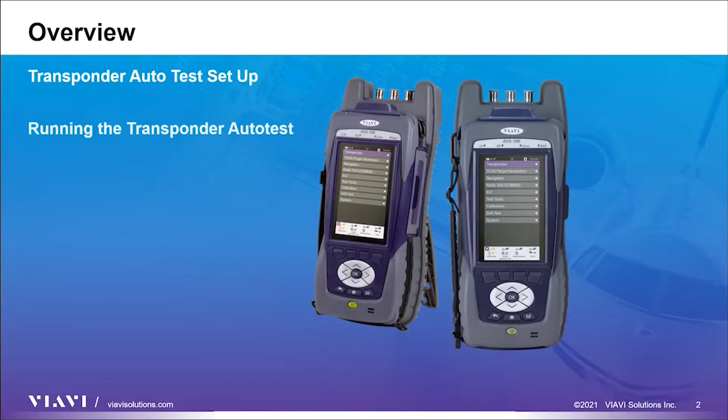Hello and welcome to this training video on setting up and performing a transponder autotest using the AVX-10K flight line test set from VIAVI Solutions. In this video, we will be discussing the settings and procedures for transponder auto testing using the AVX-10K. We will also go over saving and reviewing test results.

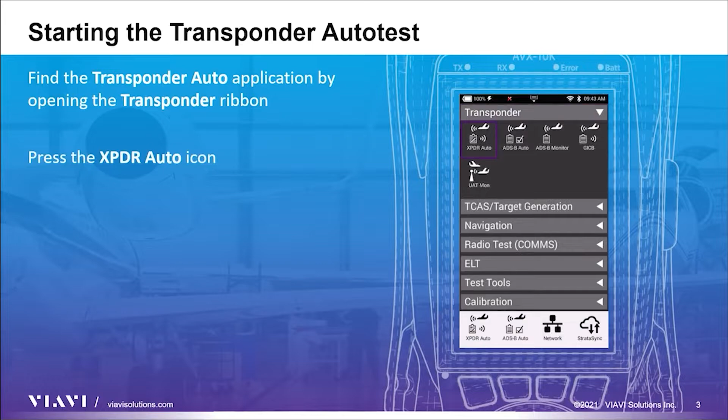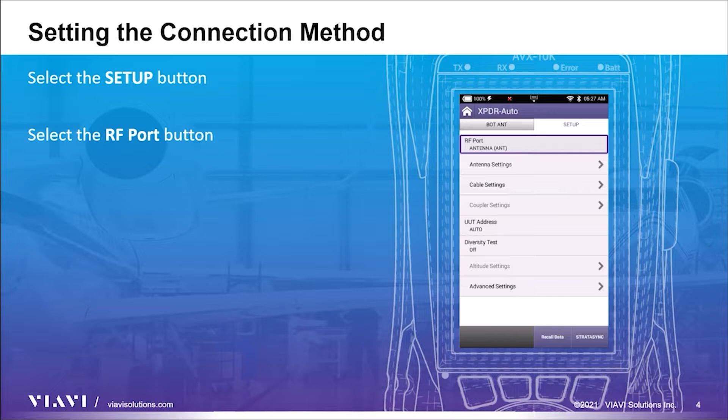After turning on your test set, open the transponder ribbon and select the transponder auto application. Before we start our testing, let's go over a few test setup parameters. The first step is to define the method of RF connection to the transponder you will be testing.

Press the RF port button to set the connection type. These are antenna, which uses the over-the-air flat panel antenna, direct connect, and direct connect with coupler.

Next, we will look at how mode S addresses work with the AVX-10K. The AVX-10K can automatically determine the mode S address of the transponder under test. In the auto condition, the AVX-10K sends out an all call. The transponder responds with its mode S address and is shown to the operator.

The AVX-10K will also use the UUT address to save test results by including this information in the name of the test result file. This helps technicians look up and manage reports by aircraft.

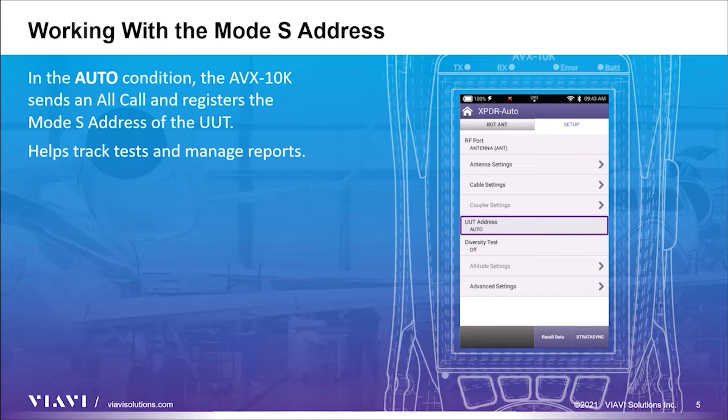To set the AVX-10K to automatically detect the mode S address, select the UUT address button. In the pop-up, click the UUT address mode button and then select Auto.

Sometimes it is necessary to manually enter the mode S address. For example, this could be when the AVX-10K is near other aircraft with their transponders energized. To manually enter the mode S address, select the UUT address option. Select Manual in the resulting pop-up. To change the mode S address value, click on UUT address and enter the values using the on-screen keyboard.

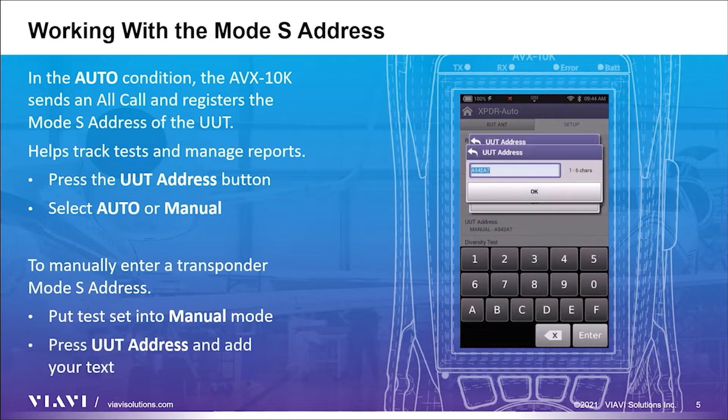Depending on the connection method chosen, there are a variety of coupler and cable loss, cable length, and antenna gain values that will need to be entered. See our video on general preferences for more information on these settings.

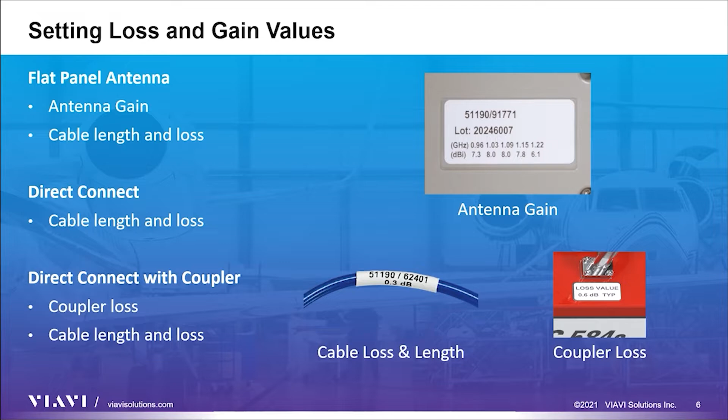Loss values can be found on labels applied to the couplers, cables, and flat panel antenna. Don't worry if you don't have a cable loss value. The AVX-10K will generate a loss value based on the length of the cable that you enter.

The diversity test setting tells the AVX-10K that the UUT has dual channels and will test both bottom and top connection points. The diversity test setting has only two options: off or on.

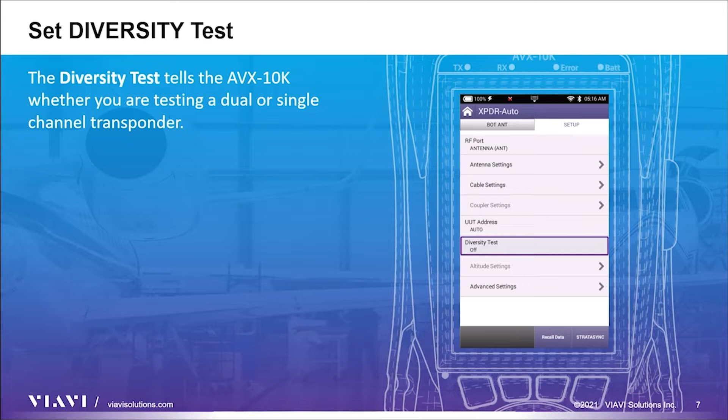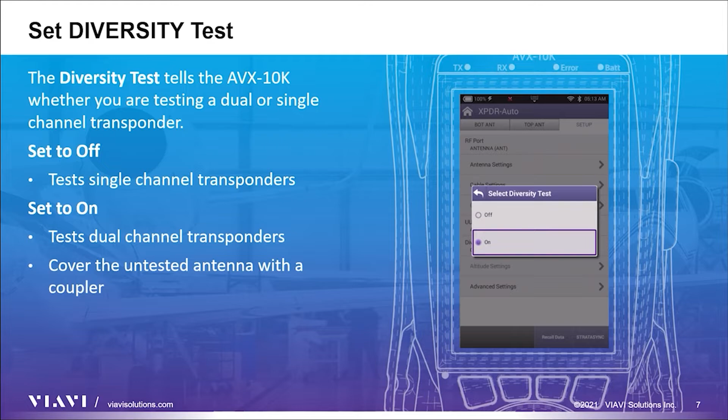Diversity off is selected when testing a single channel transponder antenna, usually installed on the bottom of an aircraft. Diversity on is selected when testing a dual-channel transponder with antennas installed on the top and bottom of the aircraft being tested. When performing diversity testing, it is recommended to cover the antenna not under test with a coupler.

Look for the change in the screen where the top ANT tab will toggle on with the diversity test setting.

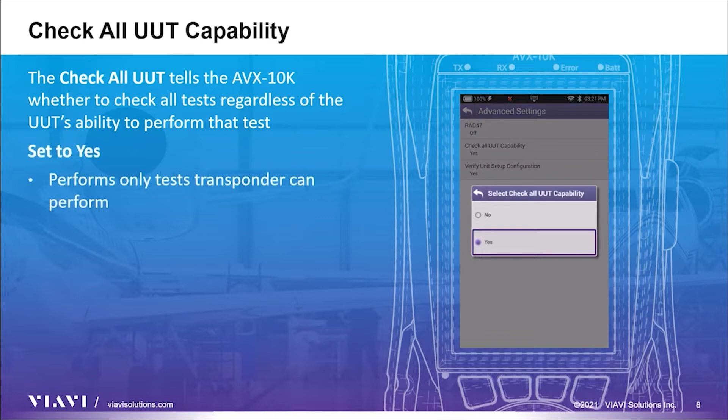The next preference users will want to address is the Check All UUT Capability option. In the Yes condition, the test set performs tests based upon the transponder's reported capability. In the No condition, the test set performs all possible tests for any transponder regardless of the transponder's reported capability.

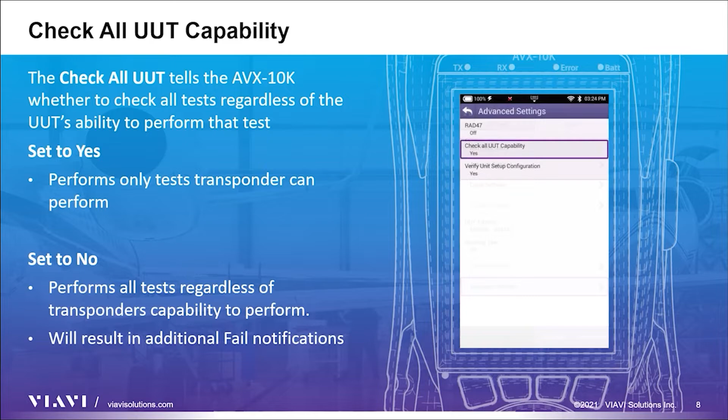To turn off or on the Check All UUT Capability setting, first, open the Advanced Settings section. Then press the Check All UUT Capability button and select your preference of Yes or No.

The final standard setting is the Verify Unit Setup Configuration. This turns on or off the setup confirmation message that appears when selecting the Run Test button. In this window, you can confirm all of the setup parameters before initiating the test.

This prevents stopping and restarting the test by providing a final chance to verify your setup parameters are correct. It also prevents test failures due to improper setup before initiating a test. To turn off or on the Verify Configuration setting, first, open the Advanced Settings section. Then press the Verify Unit Setup Configuration button and select your preference of Yes or No.

For us to be able to test the aircraft's transponder, the aircraft must be set up in the airborne condition. Once that is done, press the Test Configuration button to select the transponder type to be tested.

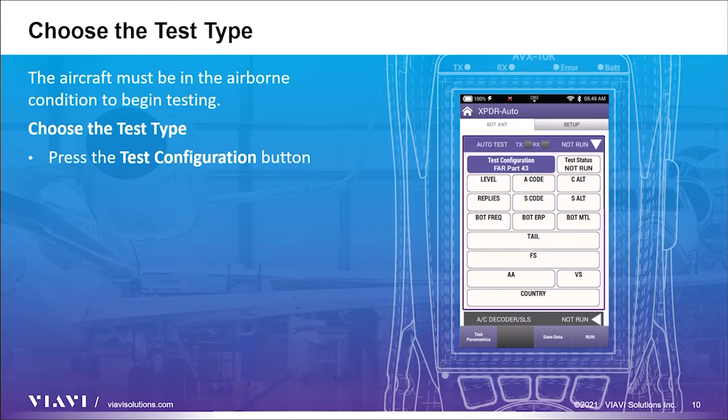The screen will update with a list of all the transponder tests available. For 2-year, 91-413 transponder certification testing, select the FAR Part 43 test configuration. This accommodates all requirements necessary for certification.

The generic Mode S test includes all FAR Part 43, Appendix F test requirements, plus additional decoding and test requirements such as enhanced and elementary surveillance. Use generic Mode S if you are unsure of the transponder class you will be testing. The generic Mode S test is identical to the test in the IFR 6000 and may be identified as that selection in many existing procedures.

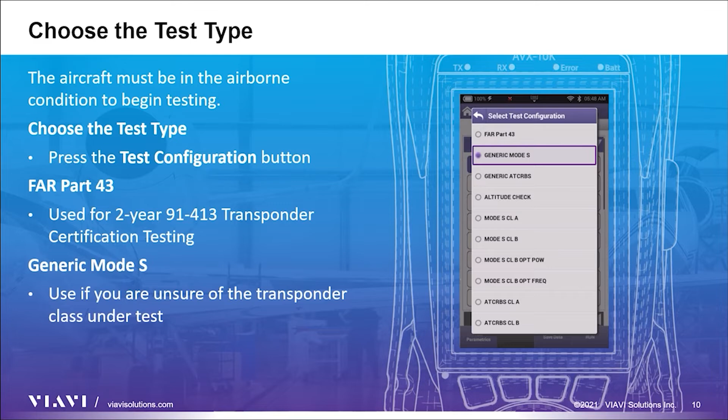The test set can also perform many other tests based on the class of transponder selected.

Now it's time to run the Transponder Autotest. Press Run in the lower right corner to initiate the test. The progress will be shown in the upper right-hand corner as percent complete during the test. Upon completion, the AVX-10K will indicate pass or fail, depending on the results of the tests performed.

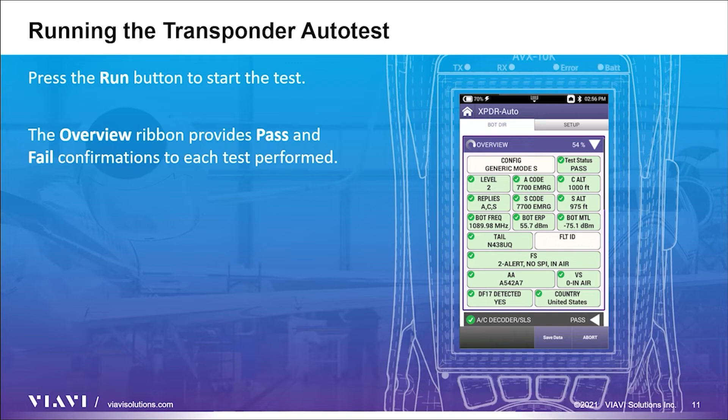Once the test is complete, you can review the results of each test performed by scrolling down and pressing the arrows on the right-hand side of individual test ribbons.

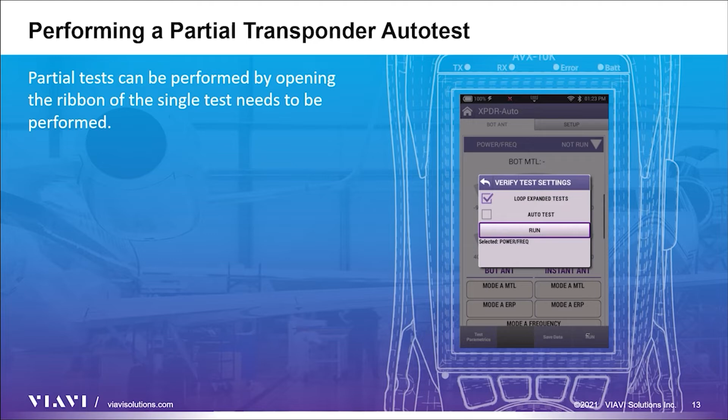To perform a partial test, open the ribbon of the test or tests you want to perform. Now select or tick the Loop Expanded Tests option. The Loop Expanded Tests will loop on all open ribbons, and it will show the user, below the Run button, which ribbons are open. Press Run to initiate the testing.

Once the test is complete, you can save your results by selecting Save Data. The test name is automatically generated by the AVX-10K using Mode S info, and includes the tail number, date, and time. However, any unique name can be chosen.

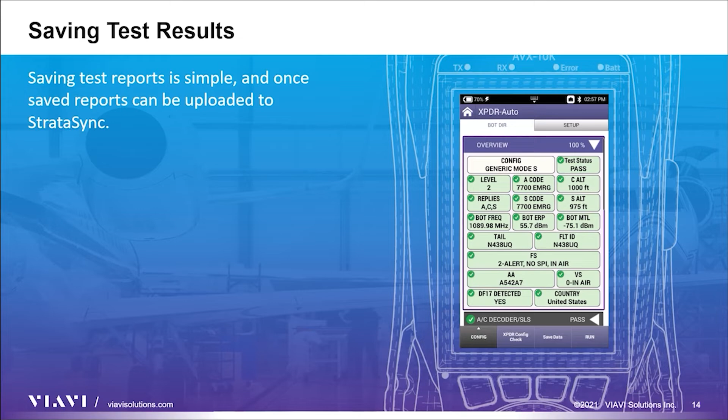From the completed test results page, click the Save Data button in the lower right-hand corner. And confirm the save process by pressing the Save button.

Depending on your system setting preferences, the results will be stored locally, to a USB drive, or to both. See our video on system settings for more information.

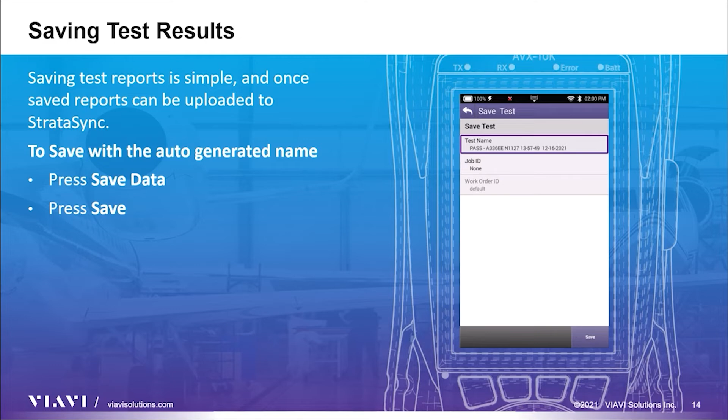To change the name of your report, press the Test Name button and use the on-screen keyboard to edit the file name to your needs. Finally, press Save to save the test results to the unit.

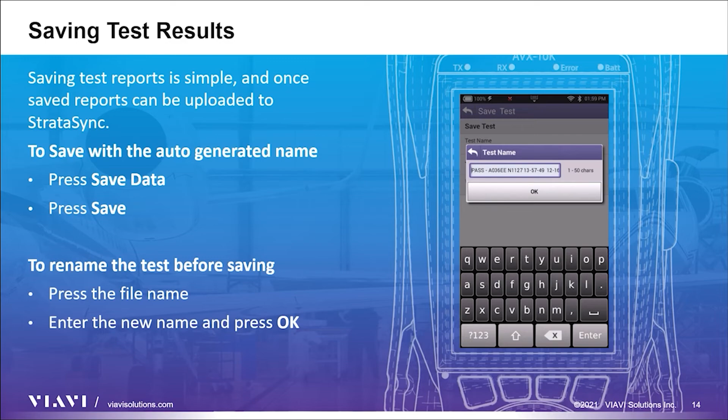After a transponder test is run, there are two buttons added to the soft keys in the lower left corner of the screen: Test Parametrics and Transponder Config Check.

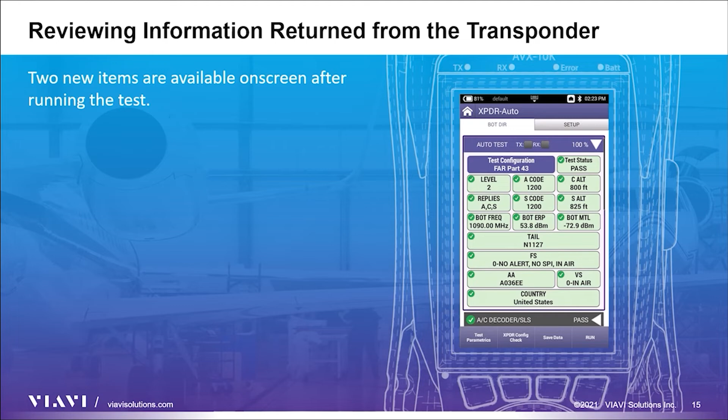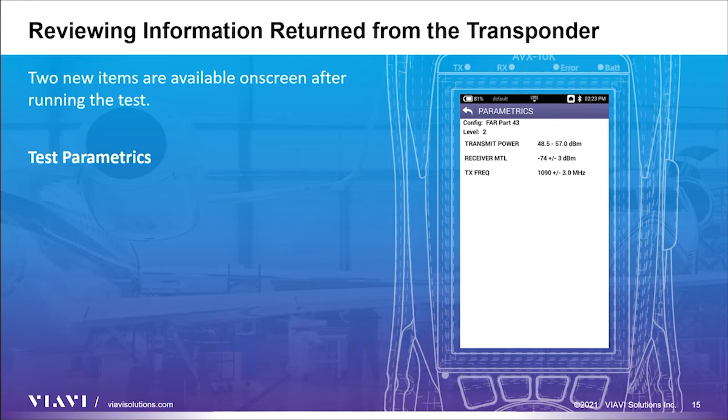The data displayed after pressing the Test Parametrics button includes the test limits for power, frequency, and minimum trigger level, as well as the level of the transponder under test. These limits are defined by the test type selected.

By clicking on the Transponder Config Check button, you can view settings that the transponder is reporting, including UUT address, tail number, and emitter category. These are important items to verify after new installations.

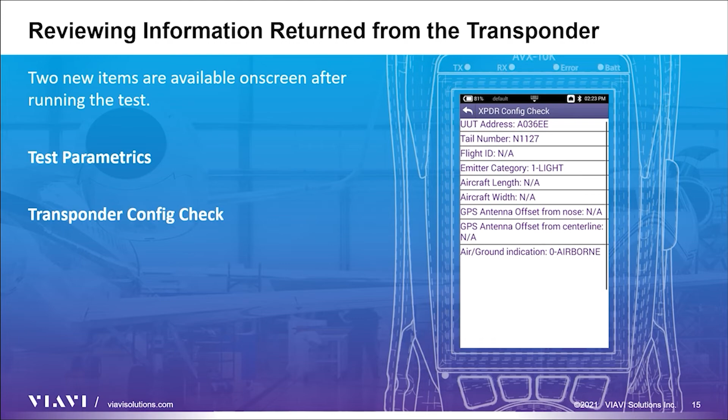Test results are stored in the file browser in the Reports folder. To access the Reports folder, head to the System ribbon and select File Browser, and look for the Reports folder. Test results stored in the Reports folder are organized in folders that are titled by the test type.

Look for the XPDR_auto folder for all of your Transponder Autotest results. Choose the HTML version of your test to view the test results on the AVX-10K.

You can transfer the files to a thumb drive or send them to StrataSync for later review. For more information on managing files, see our video on the user interface and using StrataSync with your AVX-10K.

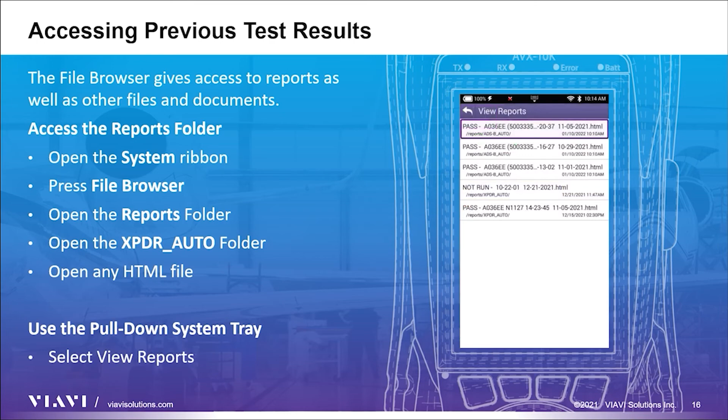Another method of accessing reports is via the pull-down system tray at the top of the screen. This has the advantage of automatically filtering out the HTML files for easier access. Viewing test results on the test set is easy.

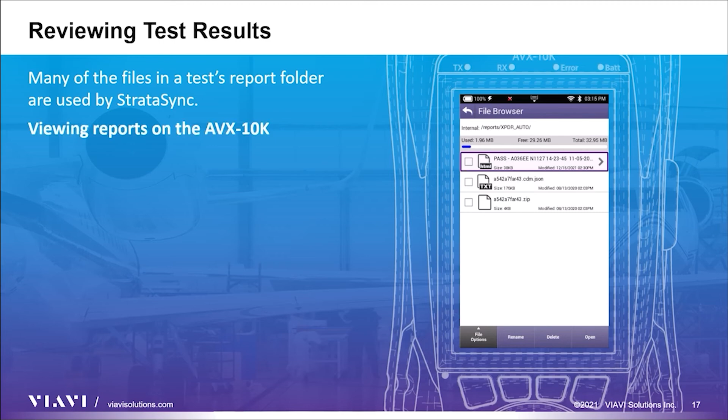When viewing results on the AVX-10K screen, click the HTML version of the test you want to view. All tests, whether they have been run or not, are listed in this report. Users will need to scroll to the section relative to their search. The HTML version of the test file is the one that users will be most interested in. Other files in the folder are for the StrataSync system and can be ignored.